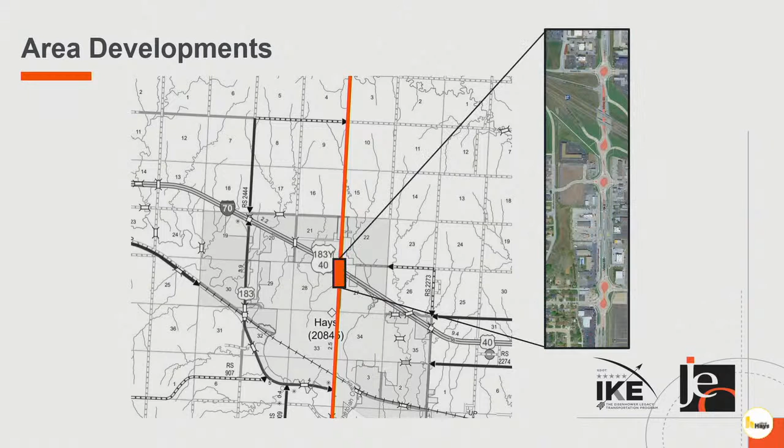So the project context, this is a map of the city of Hays. When we talk about area developments, obviously Vine Street, if you're around, you know there's been a lot of activity along Vine Street, and I'm told the last phase is coming along very good.

We drove through that today, so that's pretty exciting development. But with the roundabouts, while they're designed to handle larger trucks, there may be some hesitancy on the part of trucks to go through that many roundabouts. And I know the county's been successful with a BUILD grant and got good bids on the bypass recently, so that will be funneling a lot of large trucks and vehicles around town to use the exit at 157 instead of 159.

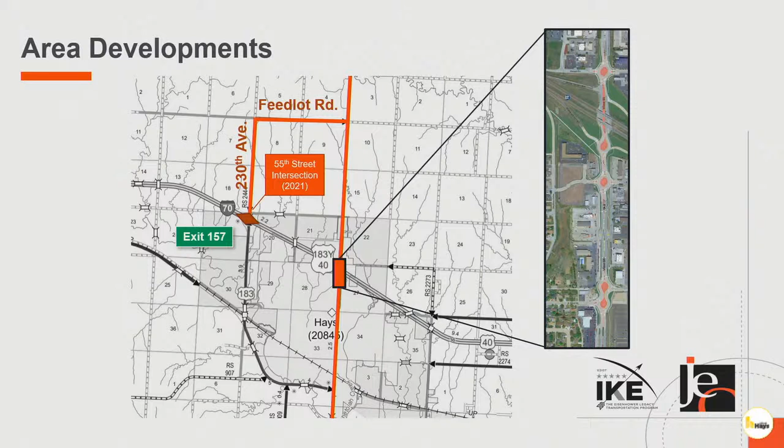With that, the 55th Street intersection's getting completed right now, and that leads us right into our interchange project, which is sort of the next domino to fall in the midst of all those developments.

Our study area basically included the area right around the interchange itself, from south of Frontier Road, where the KDOT and Highway Patrol shop is, up north to 55th Street, essentially where the new intersection improvements are being constructed as we speak.

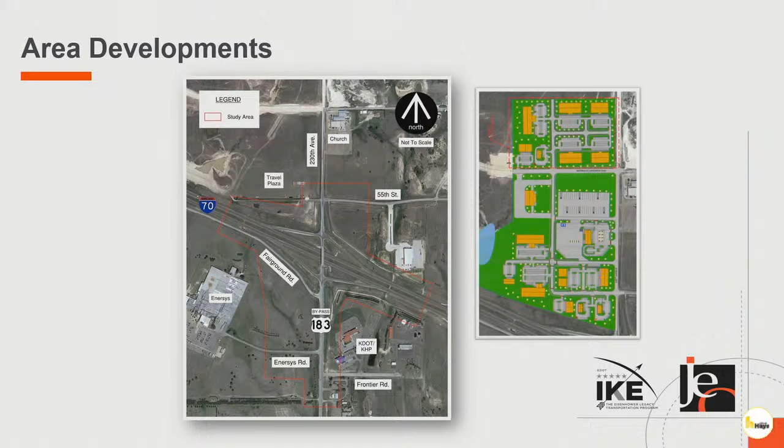Also, I'm sure you're aware of the truck plaza going in, a fairly major development and a big driver of traffic coming to the interchange. Even today there are issues getting off I-70 and onto the 183 bypass, so once that truck plaza and development comes in, that's going to add additional traffic to the system that we need to address.

So as we look at area development and growth, there's a lot of business park, the pink, Civic... I was told how to make the pointer here, I'm going to get the hang of it.

I didn't practice. But obviously the residential's coming in, and you can see there's a 10-foot path to the south, and there'll be a 10-foot path up by the new truck plaza. So how do we tie all those things together with the traffic that's going to come through? And obviously along 230th, there's several major drivers of development and growth available as that project gets completed, so there's certainly potential for a lot of extra traffic to come down to the new interchange.

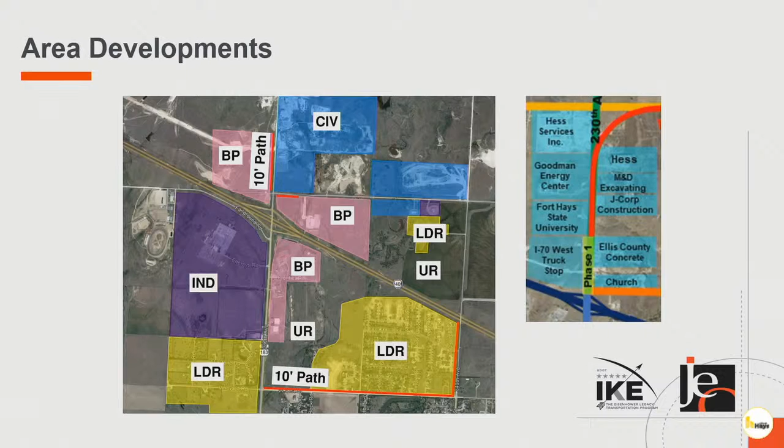So at the interchange itself, some of the things driving this—originally this was a bridge replacement. We thought, oh, that's a narrow bridge, and now we're going to have these large trucks coming through. KDOT had on the docket, over the next 10 years, to replace this bridge regardless of what happened at the interchange. But with the development, there was an opportunity to take a step back and ask: what's the long-term needs at the interchange? How do we set this thing up for the future that will work with everything else that's going on?

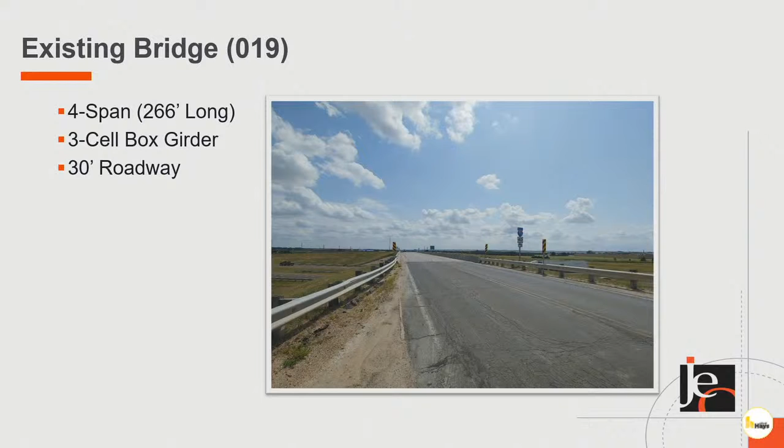So that 30-foot roadway that's there today can be difficult as you come up to the end ramp terminal and try to see around the existing bridge.

As trucks try to make this turn, this is a picture of just a regular old semi trying to make that turn, and you can see how tight those curves are for just a regular semi, let alone a wind blade truck trying to make that maneuver. I believe even at times they've had to take down signs or get into the guardrail just to get those bigger trucks through there. Part of what drives that is a very severe angle between I-70 and the ramp terminal itself, so it's not very truck friendly.

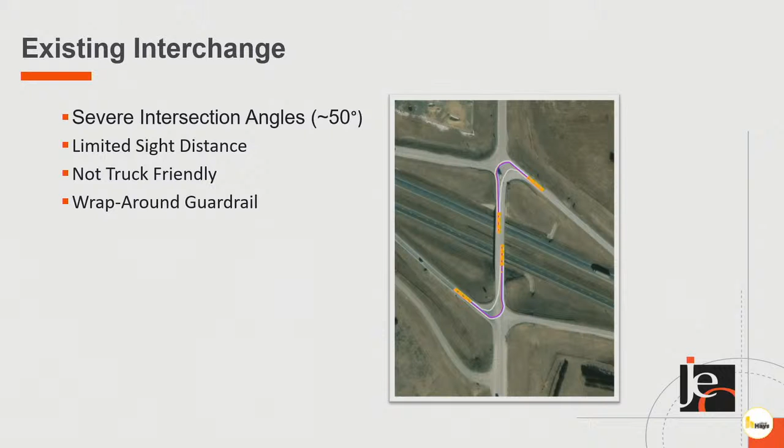It's got that wraparound guardrail. If you go out there, you can see it's all dinged up, that's from trucks hitting it. And the sight distance, the angle, as I mentioned, is fairly severe. So those are things that add to safety and the ability of users to use that interchange.

JEO also took a look at the ramp safety data. What we found is those old ramps, over the years they've been overlaid, and so some of the bank that normally would be in a ramp to help a car stay on that ramp, over the years that's really gone away and it's flattened out. So we really see hot spots of accidents occurring along those ramps. And they're fairly short ramps as well when we compare them to modern criteria, so trucks and cars coming off the interstate don't have a lot of time to slow down before they get to the top of the ramp. That's borne out in what we saw in the traffic data.

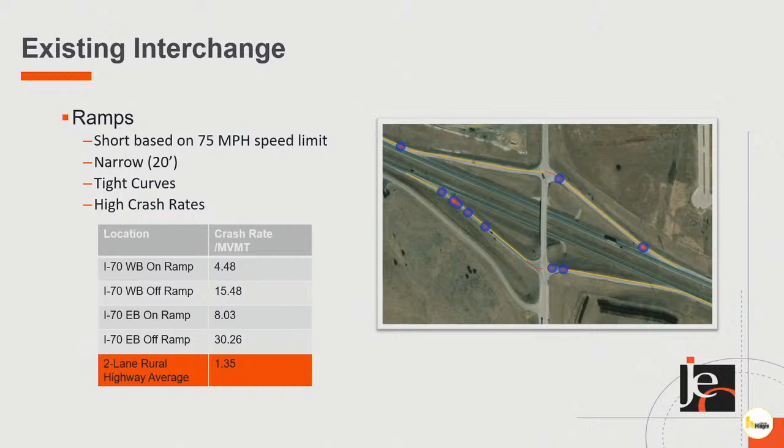This is just a lot of extra numbers, but the point here is the numbers on the left are the locations on the ramp, and the numbers on the right are the crash rates, the number of crashes per million vehicle miles traveled. The bottom red line is the rural two-lane average, so 1.35 per million vehicle miles traveled. You can see on the ramps we've got, in some cases, 30 or 15, so significantly higher crash rates. Part of that's because it's a very short section, just mathematically and statistically that happens. We would expect a little bit higher, but it's fairly high compared to a normal two-lane road.

The existing bypass, when we look at the main line of the 183 bypass, it's 2 lanes, has a 50 to 60 mile an hour design speed, but part of the issue is there's several close accesses. 55th Street is fairly close to the interchange to the north, that's kind of a fixed item there. But Fairground Road south of the interchange, there's been a lot of anecdotal evidence that maybe people are looking for Fairground and they turn the wrong way into the interstate. A lot of that's just because it's within just over 200 feet of each other, so vehicles can get confused there. Obviously that area shows up as a pretty big hot spot for us when we look at crashes.

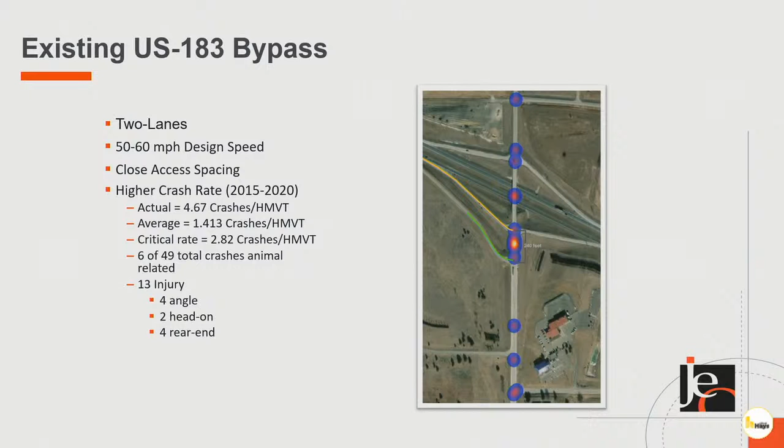Again, this is just a lot of traffic data, but the crash rate on 183 is 4.67, the average statewide is 1.4 for a similar type roadway. Even if we look at kind of a statistical barrier of 2.82 crashes, we're statistically higher than average is what that's telling you. Along 183, we've seen over the last several years 13 injury crashes, a couple head-ons, a couple angles, a couple rear ends. The rear ends may come from lack of turn lanes, the angles from the sight distance, and the amount of traffic on 183. So those are things that definitely catch our interest as we're evaluating an existing piece of infrastructure.

As far as future traffic needs, we looked at a traffic impact study for the travel plaza. We took that data and added to it to give the full picture of the interchange. I believe that study ended at the northern ramp terminal; we went ahead and took that through the entire study area. What we found is right now there's no auxiliary lanes off the ramps, but they are warranted in the future. So both off-ramps, eastbound and westbound, we will plan to have additional auxiliary lanes so that as traffic increases, we're not queuing back into the interstate, which would be a dangerous situation.

On 183 itself, we found that having a 3-lane section with a center turn lane would also help some of the rear end crash concerns, as well as help operations overall. Coming into the interchange from the north, there will be a dedicated right turn lane. Coming into the interchange from the south, there will be a dedicated right turn lane to get on I-70. We also looked down at Frontier Road, and I'll show you that concept, but essentially at Frontier and Fairgrounds, or Enersys Road, there will be a traditional left turn lane there as well.

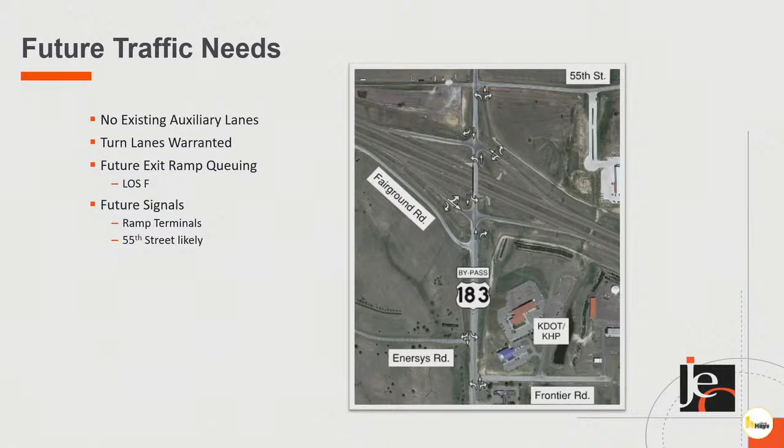So the proposed concept - we considered several things as we evaluated concepts. We looked at 6 different things. If you really want to talk about that, we can look at the concept report together. I'm going to mostly jump to the actual concept that we selected in coordination with KDOT's executive staff.

Essentially some of the things we reviewed are safety on the ramps, safety on 183 bypass, future traffic demands. Are we setting up the project to accommodate the proposed development? Are we accommodating oversized vehicles with whatever concept we come up with? And what about pedestrian accommodation? Typically, KDOT does not include pedestrian accommodation in a project, and that's sort of true here too - I'll discuss where we're at with that. And then traffic handling during construction.

If we were to rebuild the interchange where it is today, we would have to close down that bridge. You've got a brand new travel plaza. Could that be a negative of replacing the bridge on alignment? Turns out that it is.

Previous coordination was a thing, so we know a lot of effort went into the 55th Street intersection. We know a lot of effort went into the build grants, and we want to honor that and set the project up to mesh with those already-going-on improvements. And then, of course, the development around - does the project serve what's anticipated in the future. So all those went into the hopper as we evaluated the different options.

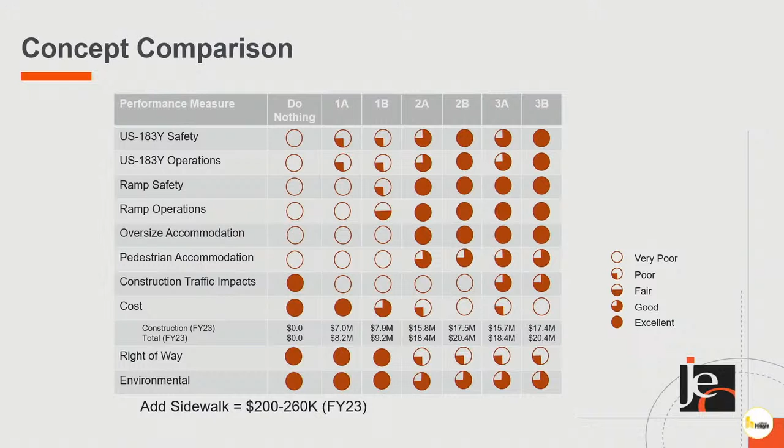So the project grading is set up for accommodating a future 10-foot path that could potentially connect down south, or connect into the 10-foot path that's being constructed around the 55th Street interchange.

So with that, this is the concept. I've got a big board over here I'll leave with the city if you'd like to look at that later. It's a little bit difficult to see, but you can see the purple a little bit if I use my... that's a back button. Which one is it, the top?

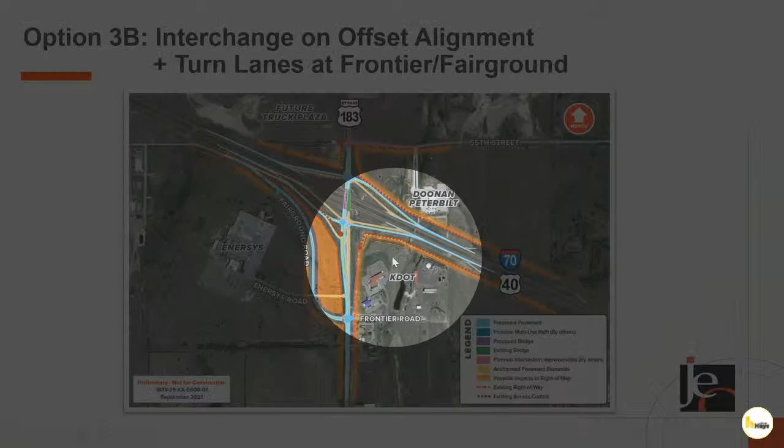Yep, okay, the purple there is the new bridge and the green is the old bridge.

And so if we just offset that interchange just a little bit, we can accommodate, for the most part, traffic through construction. Now, even with that, there will be a couple times, maybe a couple weeks at a time, when we build each ramp terminal, that we'll need to close down, say, a ramp terminal. But other than that, we should be able to largely keep 183 bypass open and keep access to the interstate, I would say 90% of the time, with the exception of some short-term closures for certain movements.

And then Fairground Road, this is the other major feature of the project, would be realigned to line up with Frontier Road, and then Enersys Road would actually get their access off the realigned Fairground Road.

So when we talk to Enersys, they kind of liked that. As you come onto the highway, there's a big hill, so if you're in a big truck pulling out of there, that gives you a little bit more of a runway to get up the hill, a little better sight distance.

And then with the left turns off of 183 bypass, having a dedicated lane for that allows them to get their staff into work and not be hanging out in high-speed traffic as they're trying to make a left turn. So we think that'll be a good safety improvement as well.

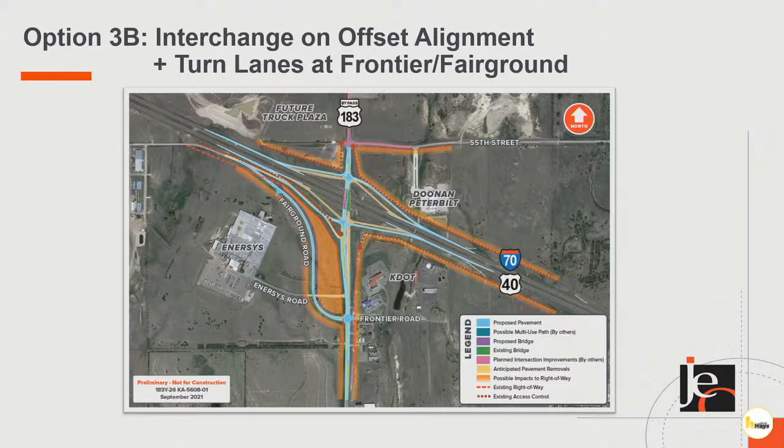There was some question, I think, about development around the southwest side. The orange area in between Fairground and 183 really isn't very developable. There's a lot of drainage that comes through that area, so there's not really enough space to put an Applebee's or something in there. You're probably better off south of Enersys Road, southwest of Enersys Road. That area sits up a little bit higher, if anyone ever wanted to do any development south of the highway.

And then obviously this is just a little recap of our concept report and a little bit more of a zoom in of the bridge area itself, with the turn lanes and things that'll go into that bridge.

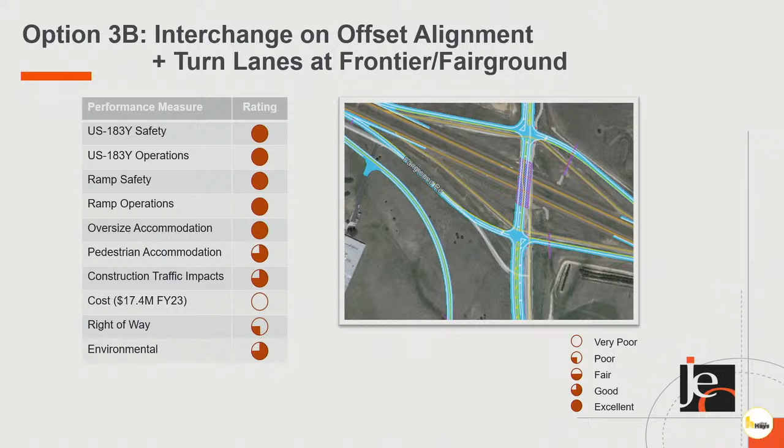So next steps coming down the line. As I mentioned, we did a concept report this last winter.

We've done preliminary design. I've got a stack of plans over there that we're ready for what we call field check, which is about 50% complete. And when I say 50% complete, I mean the footprint is basically set. We know where the construction limits are. We've got a pretty good idea of right-of-way needs. And so there's a lot of geometric design that's complete.

So the next 50% is traffic control, incorporating standard drawings, finalizing the bridge design, those kind of issues. But the footprint of the project, I would say, is probably 90 to 95% complete at this stage.

And so the next steps: in October, there's a local consult meeting, and I assume you're all familiar with that, but essentially KDOT has gone out and is going out to all 6 districts, as they analyze their next 2 years of construction pipeline funding. They want to hear from the local communities what's the main priority, and we're in District 3, excuse me, what's the main priority for northwest Kansas?

And so that's where Goodland may come with their ideas, and Norton may come with their ideas, but Hays is in the group too, and what's the most important thing for the entire region to spend those limited dollars on?

And so that's where for you guys to consider partnerships with Ellis County and the local businesses in Hays, what's your main priority for the IKE transportation program and that construction pipeline. In order to move this project forward, that's really going to be dependent on the outcome of that local consult meeting and inclusion of the project in the IKE pipeline.

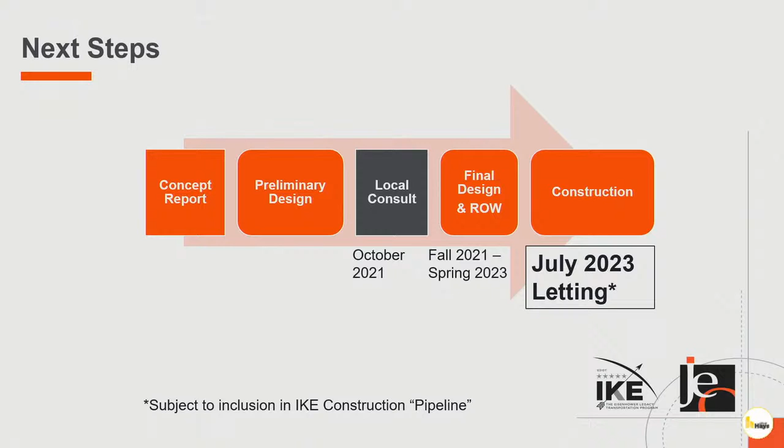So with that, I'll just say thank you and open it up to any questions you may have, any discussion.

Commissioners, where do we go for this local hearing? Originally it was going to be right here in Hays, but due to the ongoing pandemic, all the meetings have been moved online. We're going to host them here as much as we can, we'll have television. We've invited the people from the county to come and anyone else that has an interest at that time. I hope everybody does come, it's our opportunity to really be heard.

Date? October 5th. A couple of you are going to be gone. Sandy has sent some invites out for that, and we've set it up here so they'll do all the Zoom work and we'll just have one screen. So we hope the county will join us, and like I say, anybody else that would like to. I've seen that when communities come together with a unified voice, it really does seem to make a difference.

John, I just had one question. When you're starting through this concept, I love the word future, and the way you're approaching this rather than just fixing a bridge. But how do you anticipate the amount of traffic that new road is going to carry along with the travel plaza completion? How do you get to that number that's going to be okay?

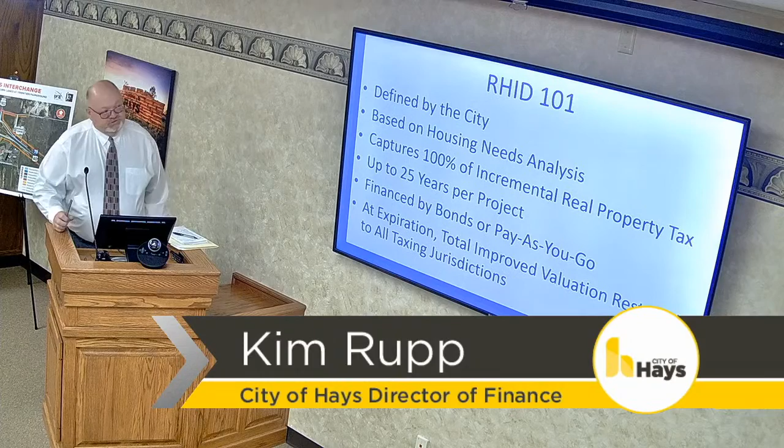So just as a refresher, we thought we'd go through a little RHID 101 again. An RHID is defined by the city or county establishing the district, and it's based on a housing needs study. That last study was 2017, completed by the Docking Institute at Fort Hays. That analysis must show a shortage of quality housing, that the shortage is expected to persist, that the shortage is a substantial deterrent to future economic growth, and that the development of quality housing is dependent on incentives.

This proposed Frontier Apartments fits within the findings of the 2017 study. The RHID will capture 100% of incremental property taxes, less the 1.5 mills to the state and 20 mills to the school. These can be up to 25 years per project and can be financed by either bonds or pay-as-you-go. Our own economic development policy, however, prohibits bond financing, therefore this development would be pay-as-you-go. At expiration, the total improved valuation will be restored to all taxing jurisdictions.

It's also worth mentioning that given this property was owned by a religious community, it's been exempt from real property taxes since its inception. Also, one of the reasons the developer is able to apply for the RHID for this project is because state statute regarding RHIDs was expanded to include preservation of historic buildings, or those older than 25 years, for residential use in a central business district. Improvements must be to the second floor of that property or above.

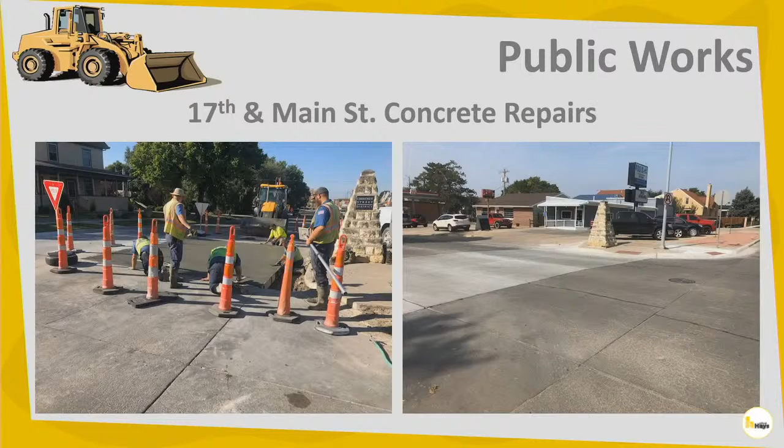20th and Milner also saw some panels get reconstructed. At the South Main Street crosswalk, they painted it to make it more visible to drivers, to make sure people are aware that a lot of people do walk across that path.

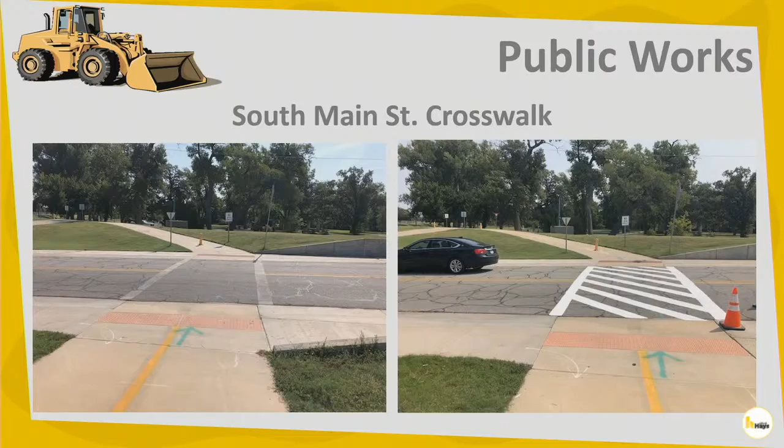Planning, Inspection and Enforcement, or PIE, brought back the Inspection Connection. That's a newsletter sent out quarterly to all licensed contractors to provide updated code information, trainings, highlighted projects, etc.

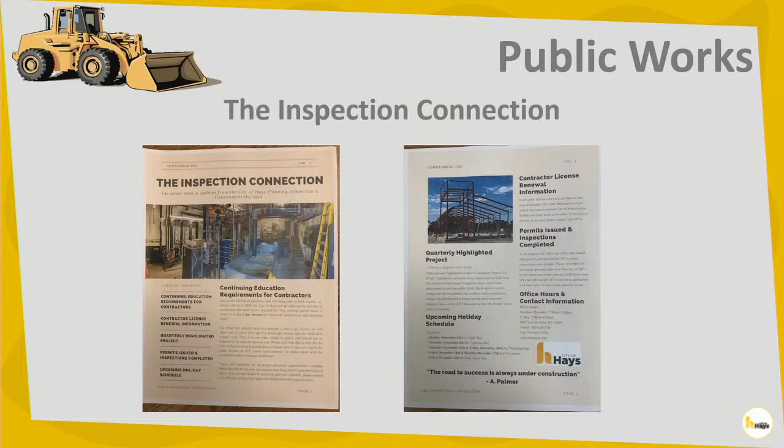PIE also participated in a virtual conference for mixed-use downtown redevelopment and development opportunities. They attended virtually, but the in-person event was in Pittsburg, Kansas, for a project they did - Block 22, where they collaborated with Pittsburg State University and the city. That's why it's being showcased here.

The Hays Fire Department participated in the 9/11 Memorial Stair Climb. 8 members of our fire department did that. Over 250 people participated in the community event.

Hays Fire Department also had a joint technical rescue training event with firefighters from Goodland, Sherman County. The scenarios focused on locating and extracting persons trapped in a building.

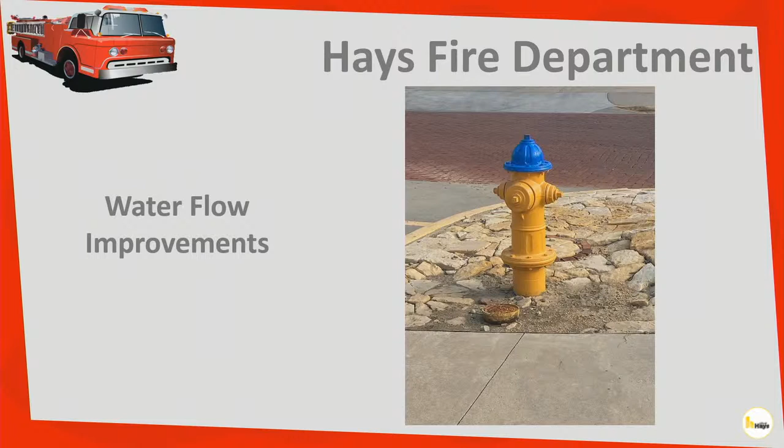Fire Department has completed all the data for the 2021 water flow improvements on our fire hydrants. They have approximately 1,100 fire hydrants that they test annually to check water flow, and depending on the flow level, they paint the tops different colors to differentiate the pressure that's in them. They saw noticeable increases, thanks to the Water Resources Department and all the proactive maintenance and replacements they're doing.

ARC Park, as you know, has come along a lot this year. On the left is a Google aerial photo of what it used to look like, and on the right is a current aerial. You can see from all the cars in the parking lot, it's quite busy.

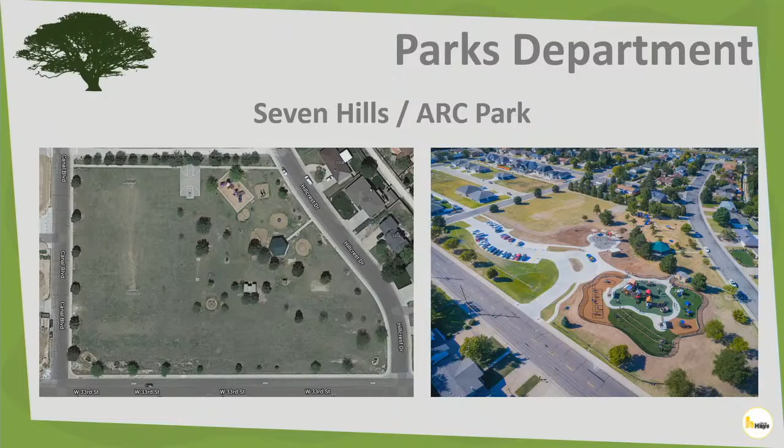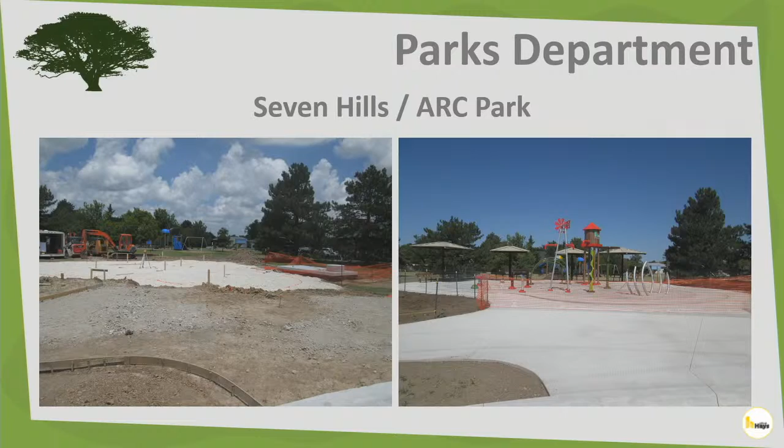The actual playground opened on the 13th, and it's been heavily utilized. This is probably outdated now, but the splash pad opened today. The left photo is probably a month or more ago, and the right was just a couple days ago. It's open 12 to 6 as weather permits - there were kids standing there waiting for the noon time to hit.

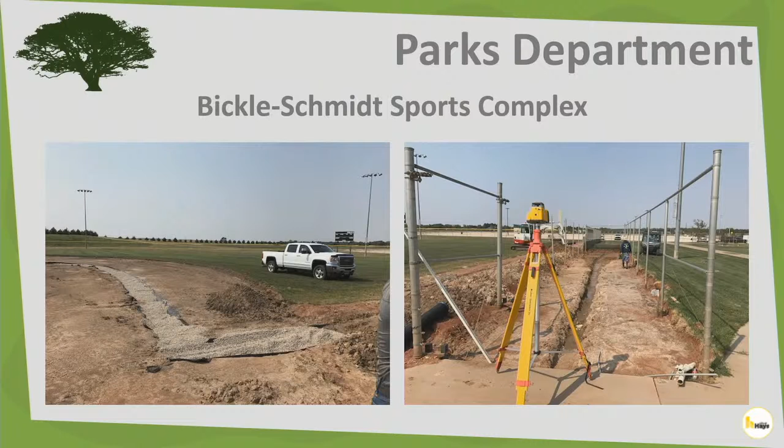Out at the Bickle-Schmidt Sports Complex, Mid-America Sports Construction has completed grade work, and they are working on the installation of infield and bullpen drainage systems in preparation for the turf project. Park staff are also working on the warning tracks to improve drainage and prepare for planting grass, and coordinating with Mid-America Sports Construction on any obstructions or conflicts with irrigation systems as they install the turf.

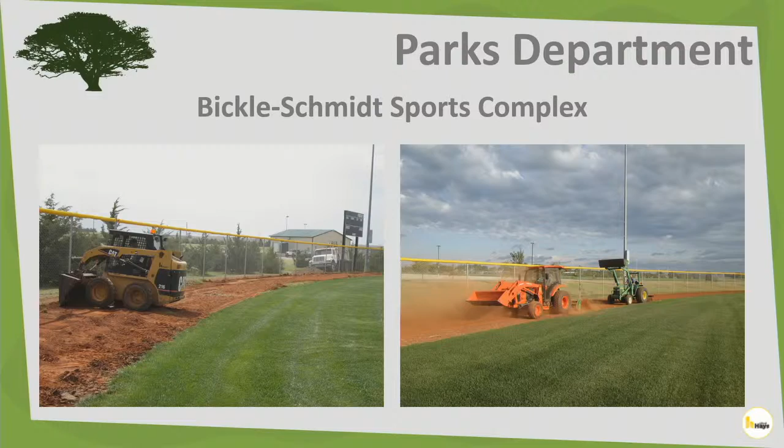At the golf course, there were some compaction issues caused by golf carts, so the golf course crew redeveloped the area and made a nice little landscaping feature.

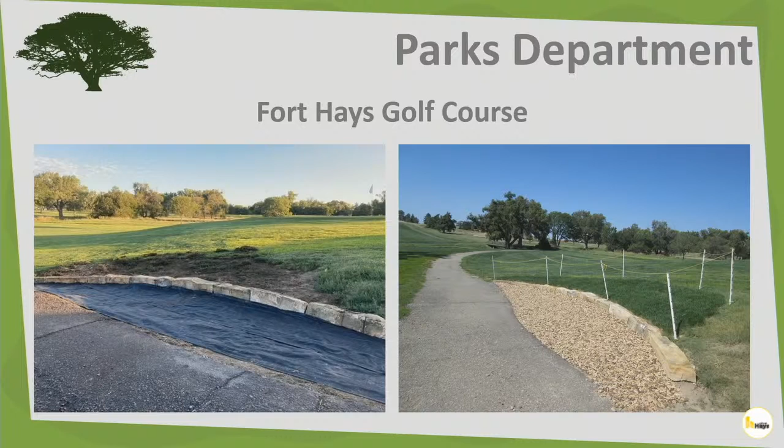Dan Rupp and Frontier Park playgrounds have had new slides installed, replacing slides that were damaged due to age and weathering.

In IT, there's a new utility billing form layout. Very exciting. The old software system had expired and wasn't being supported anymore, and it took a lot of work from our IT department, working in coordination with Kim, the finance department, and the vendor. So people will be getting new bills.

Hopefully the new bills are a little simpler. The perforation part is on the bottom now, which is more aligned with most billing companies.

On 9/11, the Police Department Honor Guard participated in various ceremonies in remembrance of that day.

The Hays Police Department participated in the You Drink, You Drive, You Lose campaign. They made 38 traffic stops and were successful in removing 9 impaired drivers from the roadways.

Outdoor watering restrictions end on September 30th.

CVB also did some partner advertising with the Sternberg. In both places, they advertise the Sternberg or the Aquatic Center, and since there's nothing date specific about these, they can be used year after year.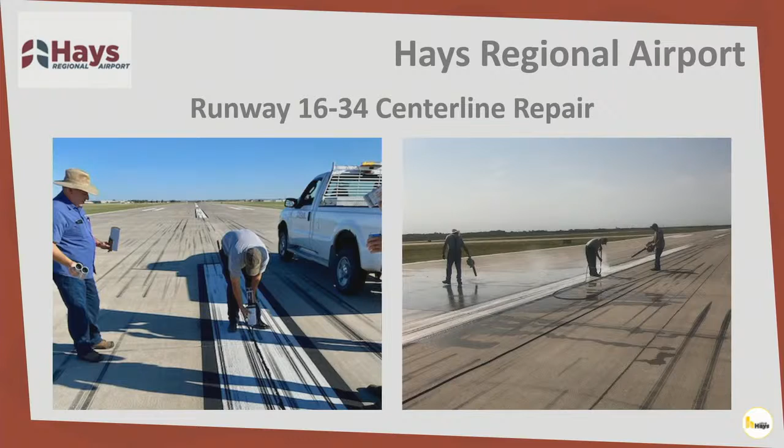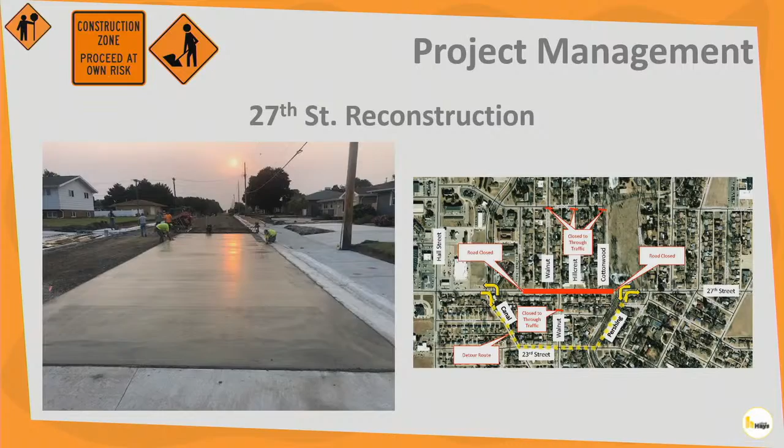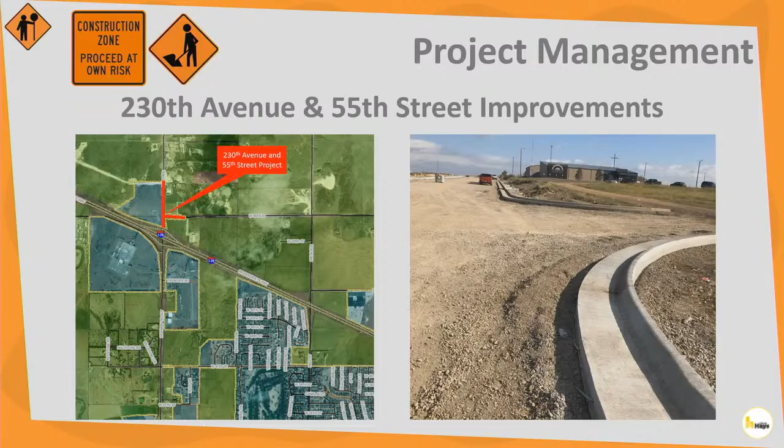Hess Services began the 230th and 55th project on June 7th. The $2 million project is funded in part by a KDOT Economic Development Grant. This is a little dated, because they've actually started pouring mainline since, but here's some curb and gutter that they pushed in recently.

The East Multi-Use Path is progressing. They are at 22nd Street now, having started down by the Hays Rec, and it's very popular there. It's about 1.4 miles in length.

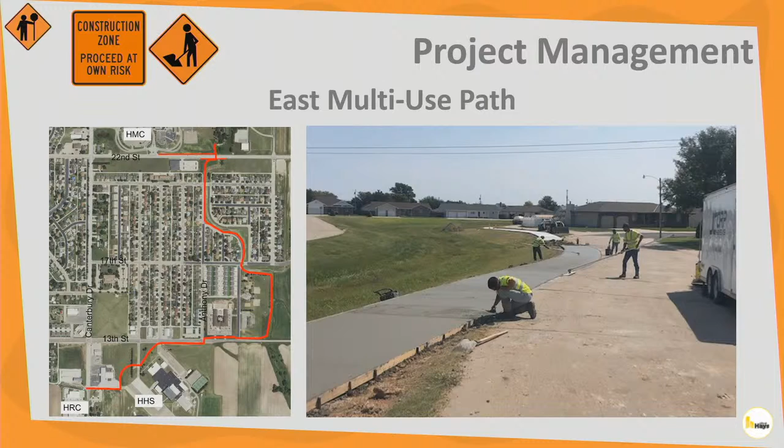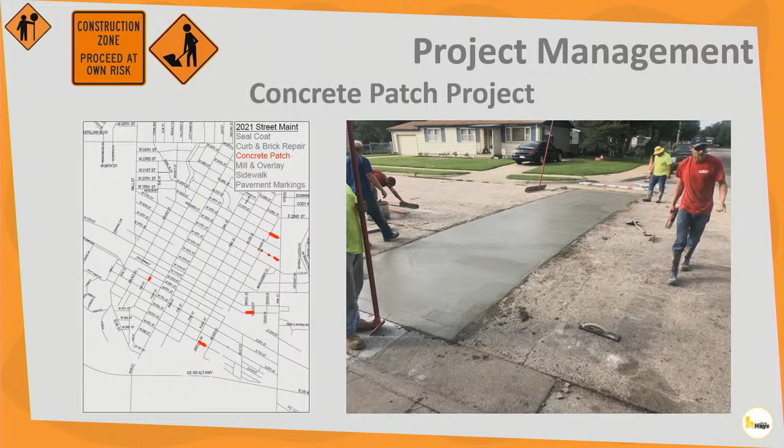Morgan Brothers completed a $177,000 concrete patch project. On the map, everything in red is where they went in and did concrete patches for us.

Last week, utility maintenance contractors began prepping sections of Lincoln Tunnel for the epoxy coating lining. You might have seen some people and gotten complaints that our tunnel was on fire, but it's because they're sandblasting and the dust is coming out. So they are prepping it for the lining.

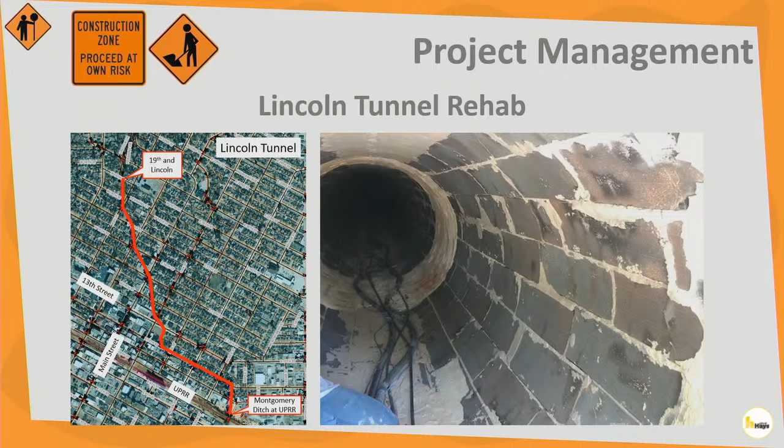So don't be concerned if you see that. And then obviously North Vine has progressed to phase 4, the second season. You got a really good detail from John, so I just have a couple pictures. These were done on Tuesday, I think, and they're already moving really fast, as Kevin Zimmer said.

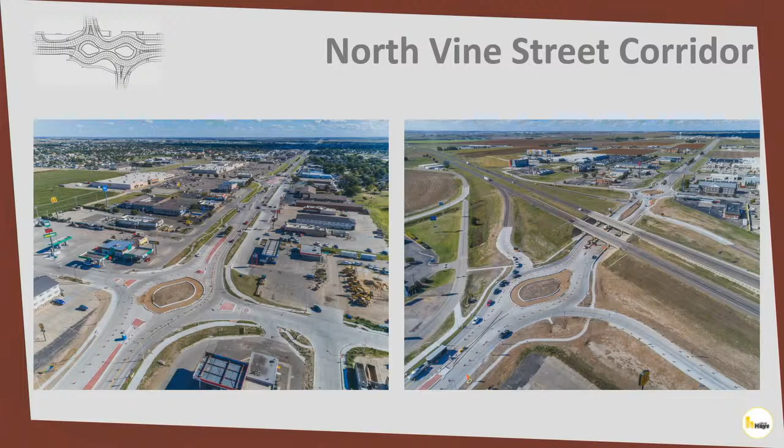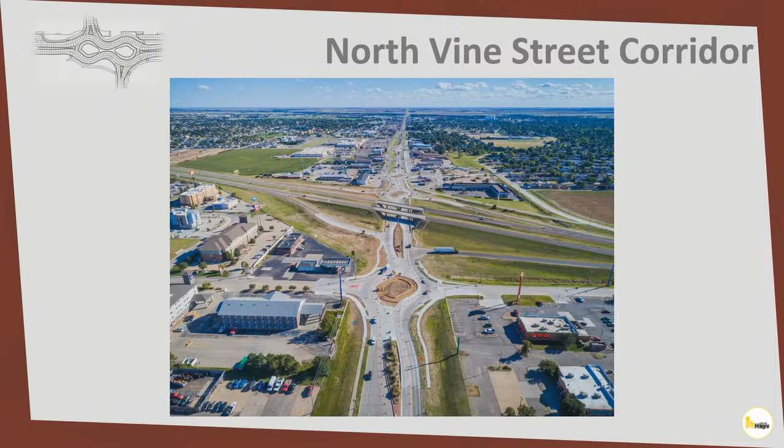The picture on the left is looking south at 37th and the 32nd/33rd roundabouts, and on the right is looking north on the interstate to 41st and Mopar. Trying to get a full visual down the line, you can see all the roundabouts, even 32nd and 33rd in the distance.

That's all I have for progress.

Thank you, Colin. Melissa, that's a hard act to follow. That's a lot of good stuff. Yes, Hays Happenings with Melissa Dixon.